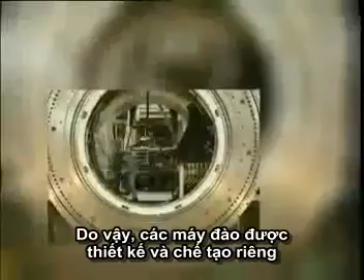Herrenknecht AG specializes in highly complex tunneling projects made to customer specification. The machine is specifically designed and manufactured to cope with the prevailing geological and hydrological conditions. This ensures maximum efficiency, environmental compatibility and safety when the tunneling project is on its way.

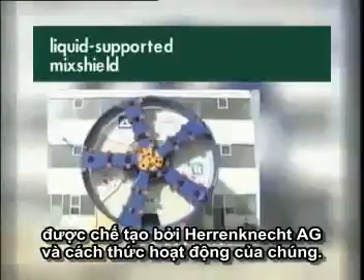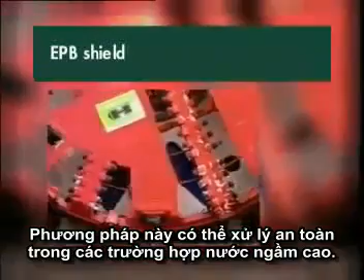Our film shows the structure of two of the most important types of machines made by Herrenknecht AG and how they work. The liquid-supported mix shield offers the best solution for successful tunneling in loose soils of all kinds and in heterogeneous geological conditions and cohesive formations. Even high groundwater levels can be safely handled using this method. The EPB shield is the first choice in homogeneous cohesive soils.

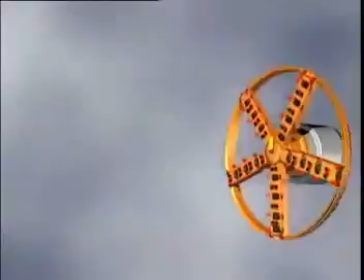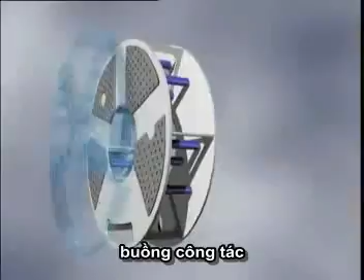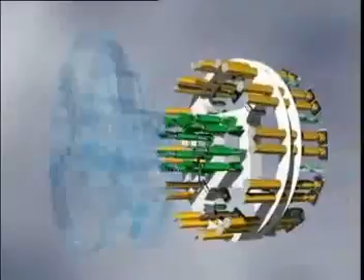The liquid-supported mix shield, shown here, consists of a cutting wheel with a center-free ring drive and special tool arrangement, the excavation chamber, the submerged wall, open at the bottom, the pressure wall, and the face support plates. The stone crusher. The feed line for bentonite, the slurry line for soil bentonite mixture, and the compressed air line. The thrust cylinders to provide the thrust force, colored yellow, cylinders for the axial displacement of the cutting wheel for changing tools, colored green, as well as articulation cylinders for driving curves.

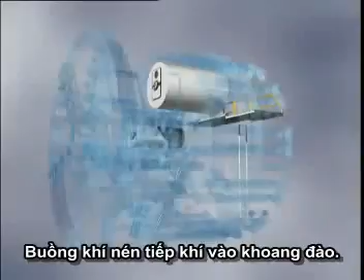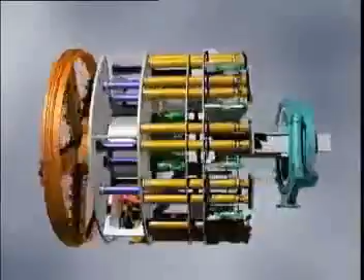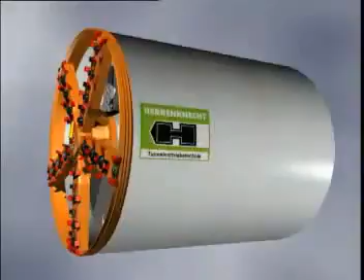Compressed air locks for access to the excavation chamber. And the erector for installing the segmental lining. All the jobs, from excavating the soil to installing the lining, are carried out under the protection of the shield.

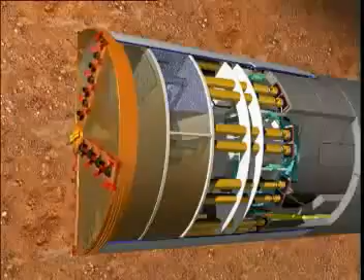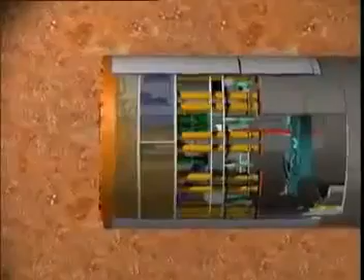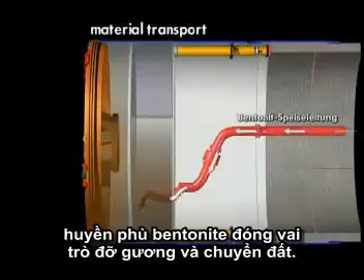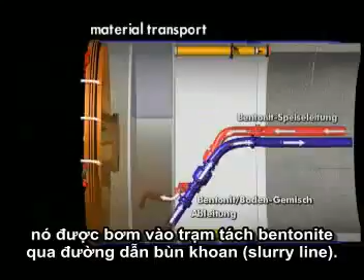In the case of the liquid-supported mix shield, a bentonite suspension acts as a supporting and transporting medium. The suspension is fed into the excavation chamber via a feed line. Here, a mixture of the bentonite suspension and the excavated soil is created, which is pumped into a separation plant via a slurry line. There, the bentonite is recovered and can be immediately pumped back to the excavation chamber.

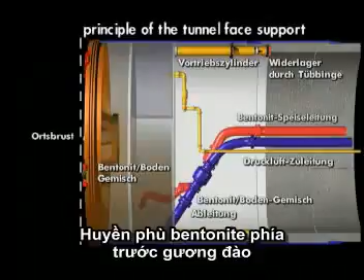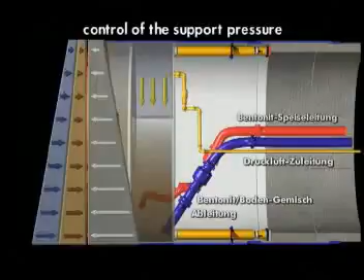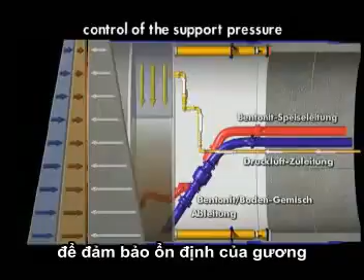The stability of the face is ensured by a filter cake placed ahead of it, formed by the bentonite suspension under slight overpressure. A compressed air chamber behind the submerged wall makes it possible to precisely regulate the pressure and thus guarantees the stability of the face even under difficult conditions.

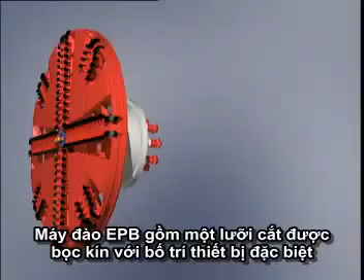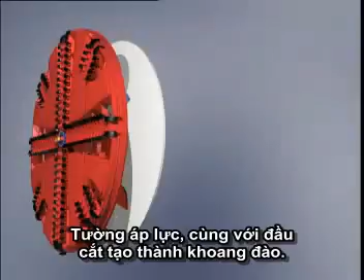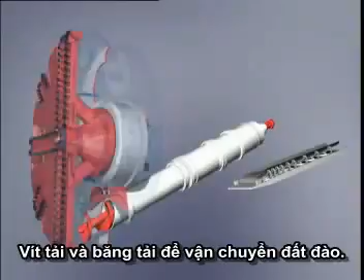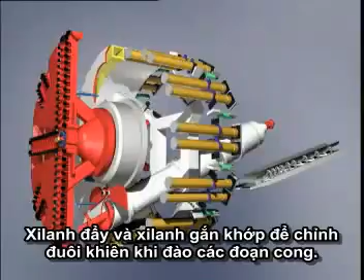An EPB shield consists of the widely closed cutting wheel with special tools arrangement and a center-free ring drive. A pressure wall with stators which form the excavation chamber together with the cutting wheel. A screw conveyor and a conveyor belt to transport muck. Thrust cylinders and articulation cylinders for inclining the tail skin when driving curves. A compressed airlock and the erector.

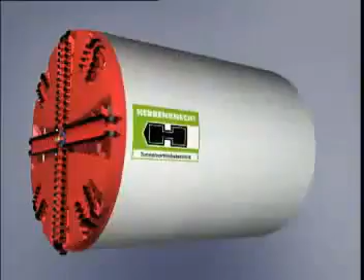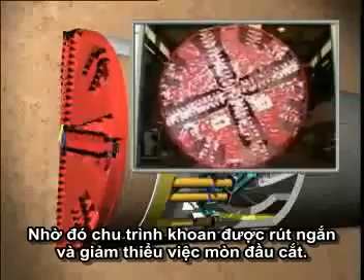In contrast to the bentonite shield, in the case of the EPB shield, the excavated soil itself acts as a supporting medium. To be able to fulfill this function, it must first be turned into a plastified consistency. Depending on the local conditions, this is done by the controlled injection of conditioning agents such as foam. This makes it possible to reduce the drive torque and cut down wear at the same time. The foam is injected into the soil ahead via nozzles installed on the cutting wheel.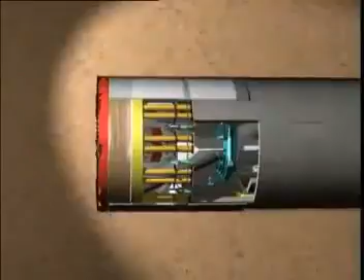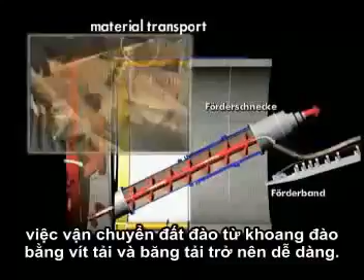Once the soil has been prepared in this way, it is no problem to transport it from the excavation chamber via a screw conveyor onto a conveyor belt. From here, it will be further transported via rail or lorry.

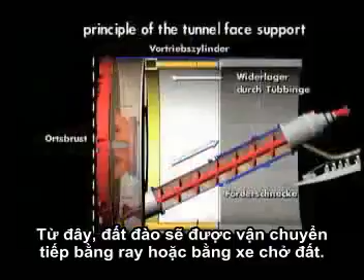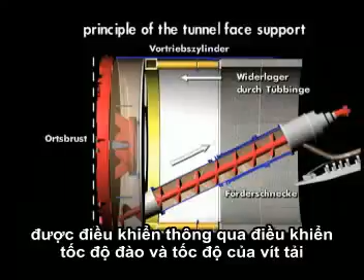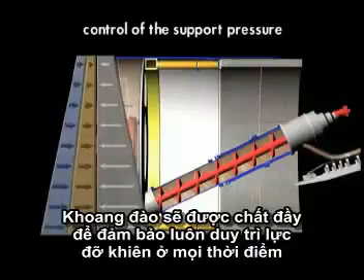In the case of the EPB shield, the pressure for supporting the shield is controlled by the coordinated control of advancement speed and the screw speed. The excavation chamber will be filled to ensure adequate support of the face at all times and to be able to react correspondingly to pressures from the earth or groundwater.